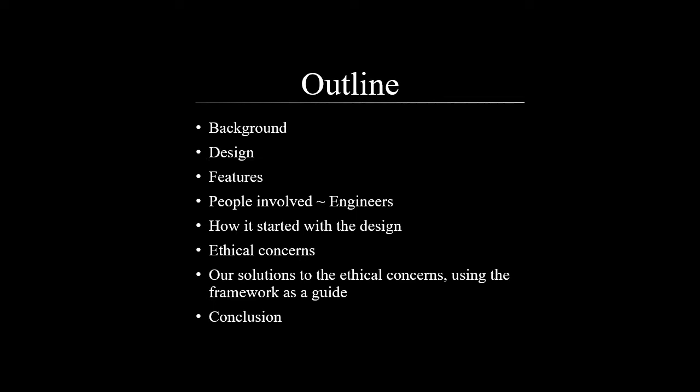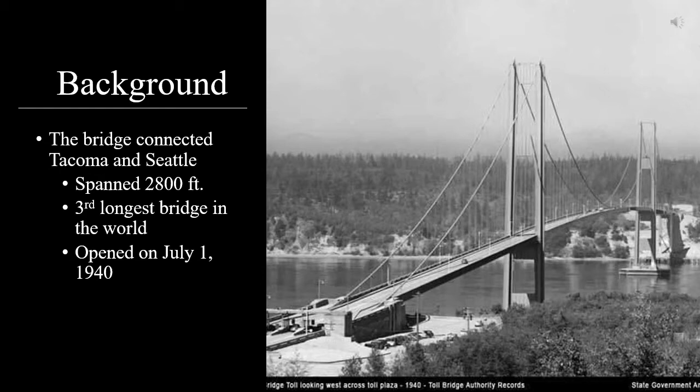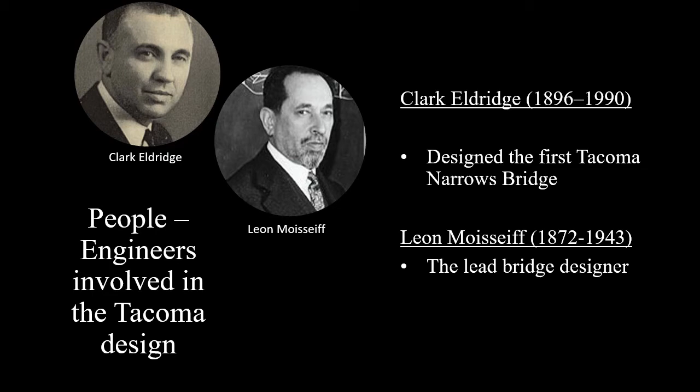The Tacoma Narrows Bridge connected Tacoma and Seattle. It spanned nearly 2,800 feet and at the time was the third longest bridge in the world. It was opened July 1st, 1940. Clark Eldridge designed the first proposed Tacoma Bridge. Leon Moisseiff then took over the project and became the lead and final bridge designer.

Clark Eldridge's initial designs for the bridge were a typical suspension bridge with 25-foot high trusses underneath the road to stiffen the bridge and keep it from swaying too much. However, the $11 million design proposed was costly. Engineer Leon Moisseiff contributed with a unique and aesthetically pleasing design that replaced the trusses with 8-foot high plate girders, lowering construction costs to $8 million, but providing much less resistance to bending and twisting.

The cheaper, slimmer, and more elegant design won, and construction began on September 27, 1938. There were problems even while the bridge was still being built, with the deck moving up and down vertically in even moderately windy conditions. It prompted construction workers to dub it the Galloping Gertie Bridge, inspired by a popular saloon song. When the bridge opened on July 1, 1940, the public experienced firsthand the vibrations of the Galloping Bridge.

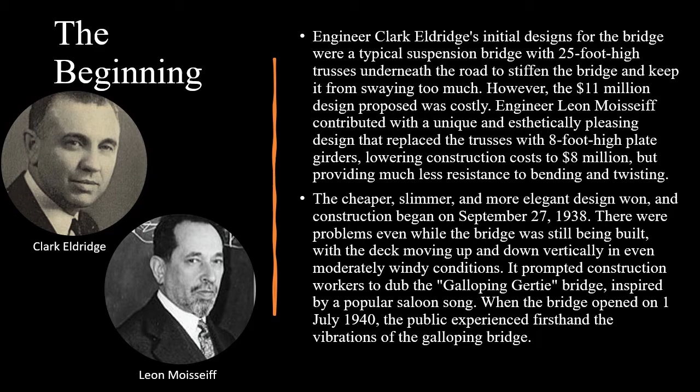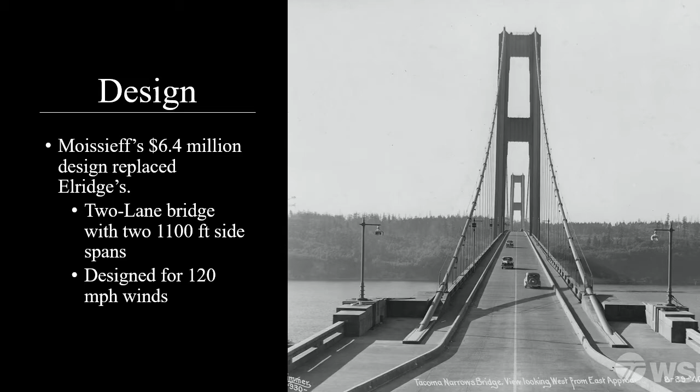Moisseiff's $6.4 million design replaced Eldridge's. It was a 2-lane bridge with two 1,100-foot side spans, and it was designed for 120-mile-per-hour winds. This appearance was known to be of great importance to designer Leon Moisseiff. This bridge featured a narrower, lighter, and more flexible design compared to other bridges.

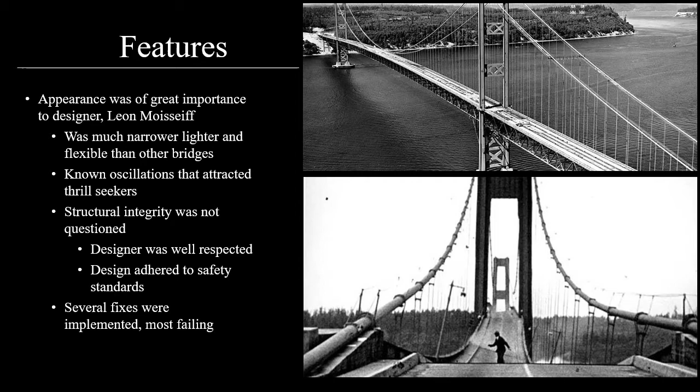However, once built, oscillation was seen in the bridge. These oscillations were actually known and attracted thrill seekers. The structural integrity of the bridge was not questioned, however, as the designer was well respected and the design adhered to safety standards of the time. After it was built, several measures were implemented, but they either failed or were just ineffective. The bridge collapsed on November 7, 1940.

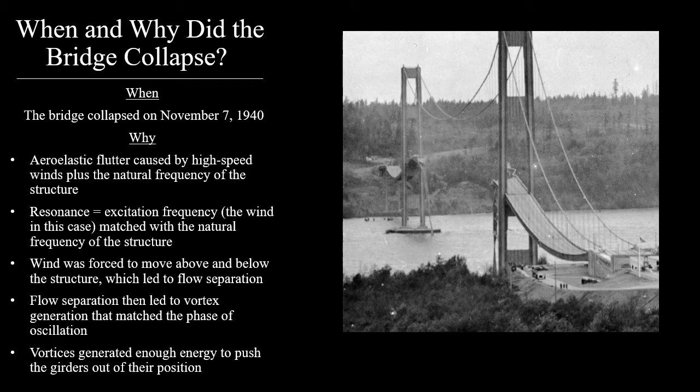It collapsed because of aeroelastic flutter caused by high-speed winds plus the natural frequency of the structure. The structure entered resonance, which is an excitation frequency that matched the natural frequency of the structure. Wind was forced to move above and below the structure, which led to flow separation. And this flow separation then led to vortex generation that matched the phase of oscillation. Vortices generated enough energy to push the girders out of their position. Here you see some GIFs of the bridge collapsing.

Moisseiff's deflection theory laid the groundwork for decades of long-span suspension bridges as they became lighter and narrower. At the time, they were used since it was cheaper because they used less steel. Within this theory, Moisseiff entirely overlooked the importance of aerodynamics.

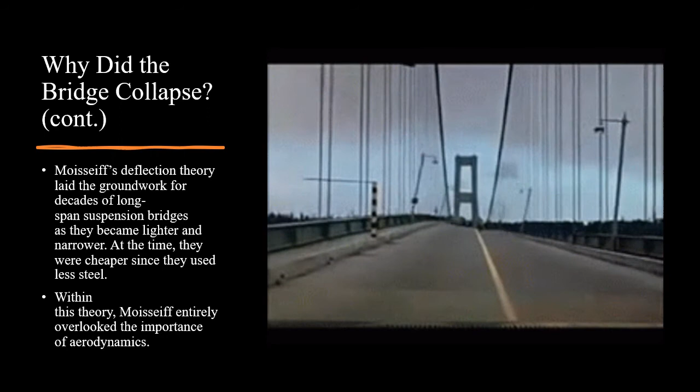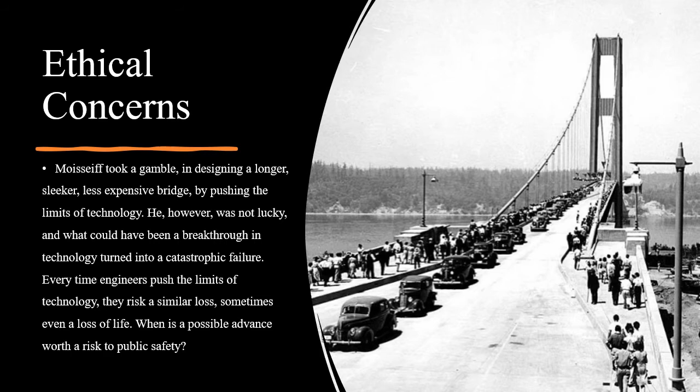Moisseiff took a gamble in designing a longer, sleeker, and less expensive bridge by pushing the limits of technology. He, however, was not lucky, and what could have been a breakthrough in technology turned into catastrophic failure. Every time engineers push the limits of technology, they risk a similar loss, sometimes even a loss of life. Fortunately, in this case, no people died. However, when is a possible advance worth the risk to public safety?

The stakeholders framework. One way to analyze the ethical concerns in this disaster is to look at who the stakeholders were and what they wanted. First, we have the investors. Even though they already had a design, they chose to change it because a new one was less expensive. Then, there's the designer, to whom the bridge's appearance was personally important. Moisseiff even dubbed it the most beautiful bridge in the world.

Also, as an engineer, a desire exists to push for new technologies. And finally, the general person who would be using the bridge wanted safety. Most of these requirements oppose each other. So what is a proper way to balance them?

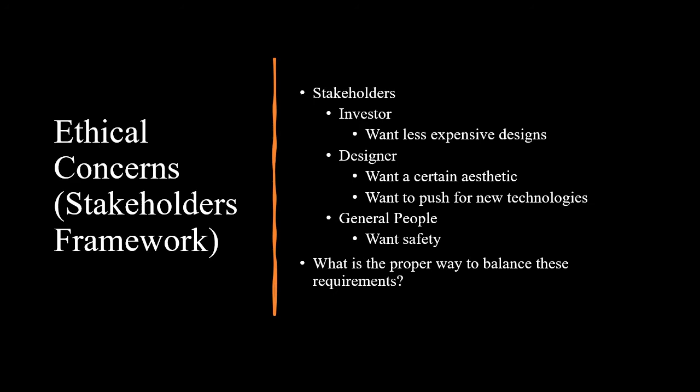We argue that investors should not have so much power over negotiations, so that a lot more consideration would have gone into the safety for all the stakeholders. The desire for less expensive designs or for aesthetics should never override the need for safety. The new, less expensive design should not have been accepted in the first place.

However, even with its implementation, several things could have been done better for the sake of safety. Transit should have been stopped, as allowing it to continue over a bridge that oscillated like that is too much of a risk. Also, given that several fixes were implemented, they should not have allowed transit until an effective solution was implemented.

There is also an argument to be made on the fact that the design adhered to safety standards. However, if one can adhere to safety standards and still cause a catastrophe, a point must be made. It is absolutely not enough to just settle for what is required by standards. Engineers must strive for excellency, following aspirational ethics in order to prevent these disasters from happening again.

Additionally, even though pushing for new technologies might not necessarily be wrong, given the correct measures are taken, the way it was done here is especially alarming. In order to push new technologies, there should have been enough evidence in the form of theoretical knowledge or experiments. However, at the time there was no recognized theory on which a design could be based.

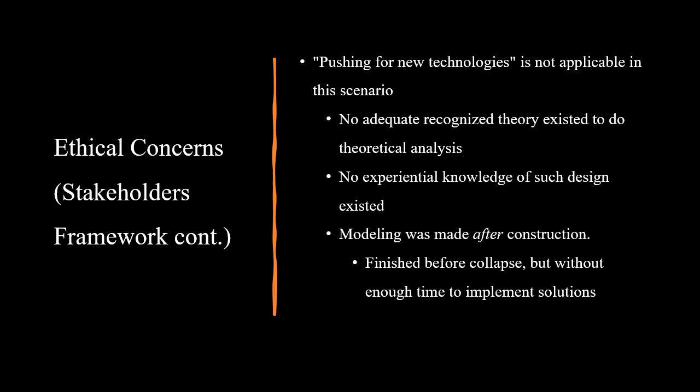Moreover, no bridge of such dimensions existed to support the design. Modeling technologies could have been used, but they were made only after it was seen that the bridge oscillated. By the time they were finished, it did not allow enough time to implement solutions.

The ethical issue of values in technology was that the value of convenience was incorporated into the construction of the Tacoma Narrows Bridge. Financing the bridge was an obstacle for Washington State. This is the reason behind why the bridge had an innovative design rather than the originally proposed trusses. Since money was tight, the state was frugal when it set funds aside for the project.

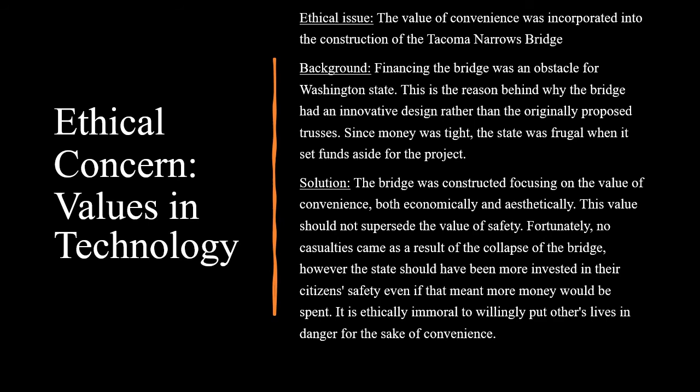The bridge was constructed focusing on the value of convenience, both economically and aesthetically. This value should not supersede the value of safety. Fortunately, no casualties came as a result of the collapse of the bridge. However, the state should have been more invested in the citizens' safety, even if that meant more money would be spent. It is ethically immoral to willingly put other lives in danger for the sake of convenience.

Learning from the failure. An advisory board on the investigation of suspension bridges convened from 1942 to 1954 to better understand and identify design measures to counter the aerodynamic effects of wind. The failure of the bridge caused a worldwide response by bridge engineers to evaluate other existing suspension bridges.

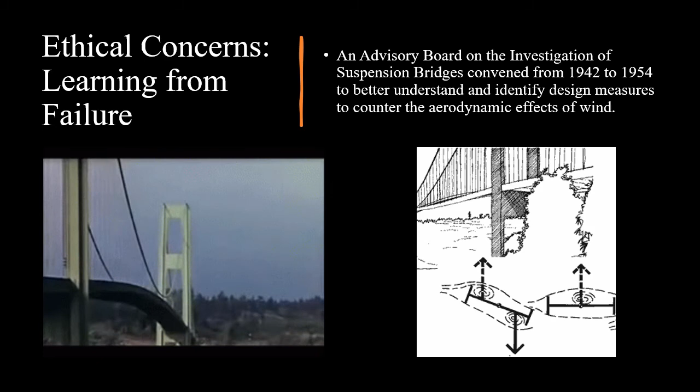In conclusion, the Tacoma Narrows Bridge case study is an example of an ethical problem brought about by an oversight from engineers. There were many concerns during the building process and after the opening of the bridge. Moisseiff's attempt to push engineering to its limits was a gamble that ended up costing him and others. This incident allows us to learn about engineering disasters and the repercussions of taking shortcuts.

Engineering is used to meet the demands of society, therefore it must be efficient and cost-effective. This demand can lead to shortcuts that reduce the cost of fabrication, which can cause unexpected failures. Engineers are tasked with the ethical duty of fulfilling the needs of society, with public safety and the wellness of society being in the forefront. In the pursuit of innovation, to reduce the cost of technology, the strive for public safety is to be considered before the implementation of said technologies.

This case also shows us that sometimes taking too many risks can cost one's career, as Moisseiff's career ended after the collapse of the Tacoma Bridge. About 3 years later, he passed away from his diminishing health conditions.